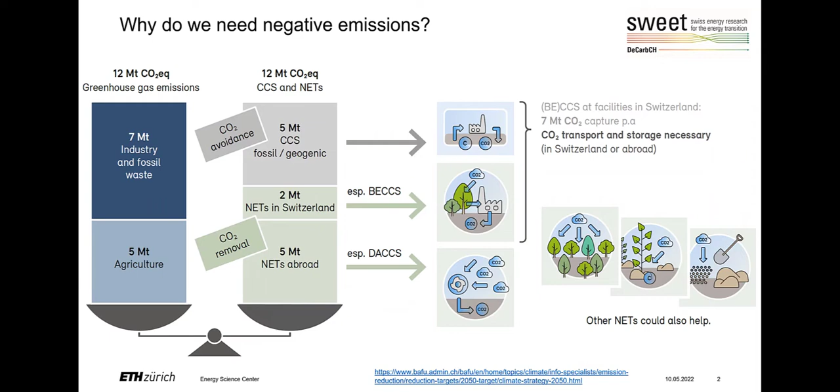So I use the same visual here and repeated essentially what you've seen before, with a small change: I want to understand whether we can do those 7 megatons of negative emission technologies actually in Switzerland - 7 megatons of CO2 per year removed from the atmosphere here in Switzerland.

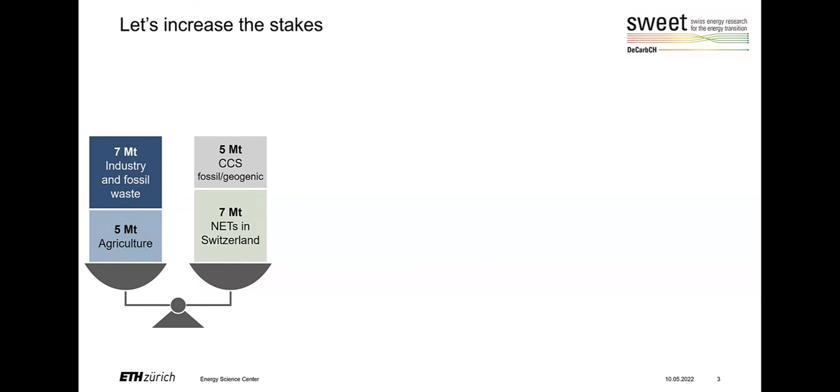But actually, we can also make it a bit more ambitious even. At the moment, we are not talking about aviation yet, but we have to, we should, and it's actually starting now, the discussion, including aviation. This may be some 6 megatons which come on top of this on the emission side, which will of course tip our balance, which needs to be compensated then with even more negative emission technologies.

And this is the space I want to explore now. What technologies do we need for that? And is there the potential to really do this?

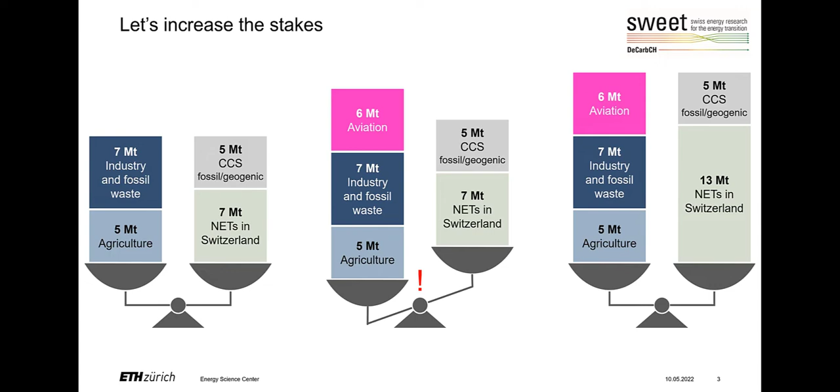What I will use for that is energy system modeling, as usual when I talk about those things. What is important to understand is that the basic thinking, the basic tool, is really to understand CO2 streams. There are 2 main reservoirs, let's say, of CO2. Actually, strictly speaking, it's not CO2, but a fossil fuel, for instance, or also a biological fuel like biomass, which however contains CO2 in the sense that if I burn it, it will be released as CO2.

So we have those 2 reservoirs. One is the subsurface, from which we can extract fossil resources. The other is the atmosphere, from which plants extract CO2 and make this available to us in the form of biomass. We can also do direct air capture, and I will talk about this as well. Now, this undergoes normally then some kind of process.

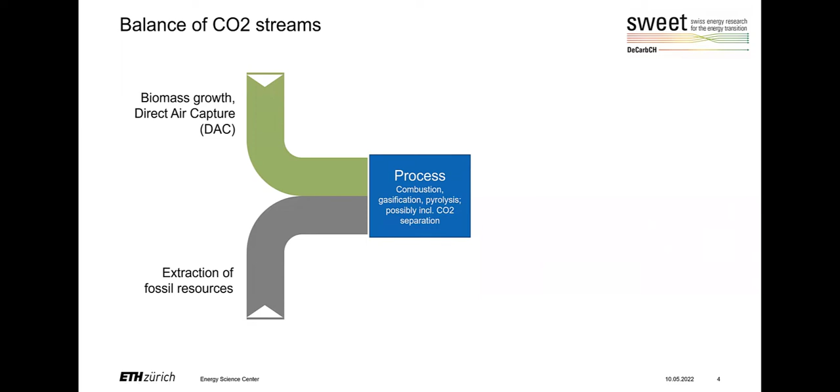Often a combustion process, but it could also be a gasification or pyrolysis process, possibly using also CO2 separation. And as a consequence of this, we again have two CO2 streams. One may go back to the atmosphere, released to the atmosphere, and the other may go to permanent storage in the subsurface, or in the case of the famous biochar, also in the soil.

So it's these balances that we need to understand in order to appreciate the value of negative emission technologies. And what I'm really interested in is two quantities. One is what I call the atmospheric balance. Do we emit actually more than we take from the atmosphere? Then we would have positive CO2 emissions. Or do we emit less than we take from the atmosphere? Then we would have negative emissions. That's what we're interested in.

And the second quantity I'm interested in is the amount of permanent storage, the amount of permanently stored CO2 in the subsurface, because this is coming with a challenge. We need to transport it somewhere and we need to store it somewhere. So it's these two quantities that I'm really interested in. Let's have a look at certain technological elements and how they fit into this scheme.

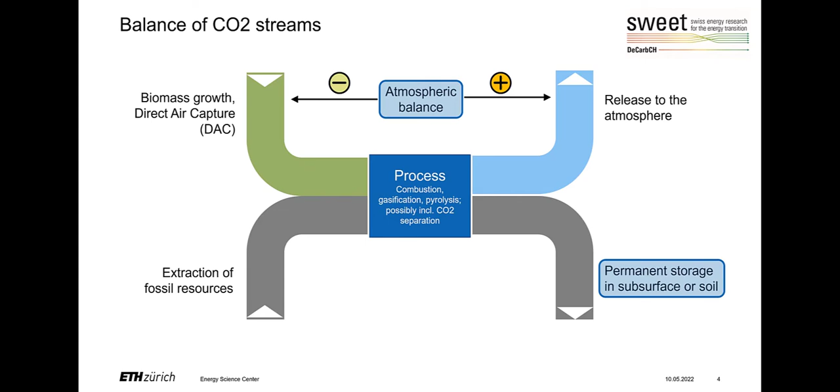Let's start with something that obviously we do today and we will have to stop doing in the future. That is fossil heating and mobility. We obviously extract fossil resources in the form of oil and gas from the subsurface. The process is the combustion, internal combustion engines or in gas or oil boilers, and we release it to the atmosphere. Clearly, it's a positive CO2 emission, which there's not a lot we can do about. In the moment that the emission is generated, it will go to the atmosphere.

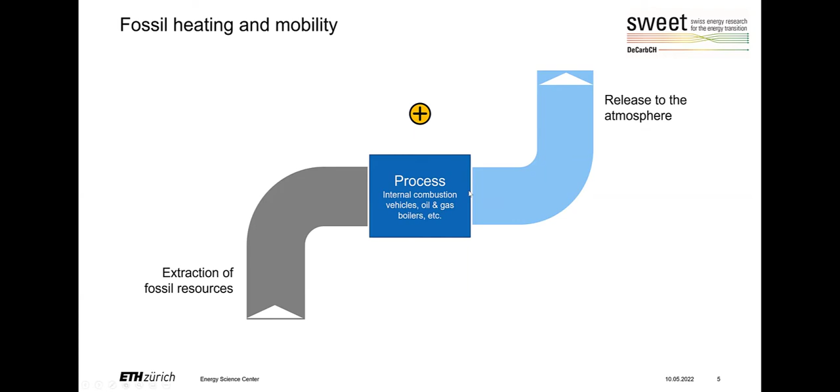The next option is gas CHP plants with CCS. Again, we will extract a fossil resource from the underground. This goes into a processing, in this case a gas CHP plant, possibly with CCS. And as a consequence of this, we have a big CO2 stream that goes permanently to the subsurface, and a small one, because normally we cannot take everything out of the flue gas of a gas turbine. This still goes to the atmosphere. So basically, we are CO2 neutral.

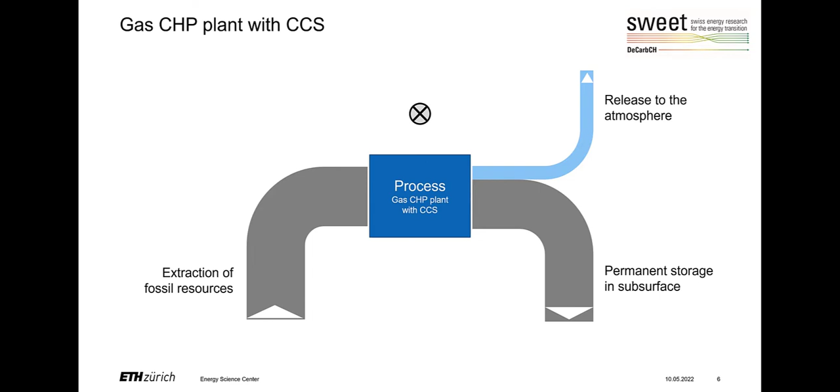Another option to be CO2 neutral is, of course, a wood pellet boiler, an alternative to oil heating as we may use it today still. CO2 is extracted from the atmosphere with biomass growth. And when we burn it in our wood boiler, it is released back to the atmosphere. And this is CO2 neutral again.

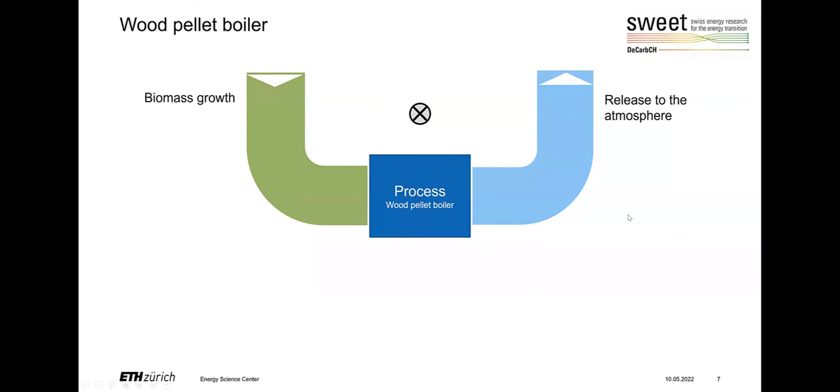This is nice because we are CO2 neutral, but we can do better than that. If we would use a wood CHP plant together with CCS, we would have biomass growth, and we would have a bigger unit, a wood CHP plant, probably connected to some district heating network, and we can apply CCS. What then happens is that the CO2 is taken from the atmosphere, and the largest part of it goes permanently to the subsurface. Again, a small part is released to the atmosphere. And with this, we are generating definitely negative CO2 emissions.

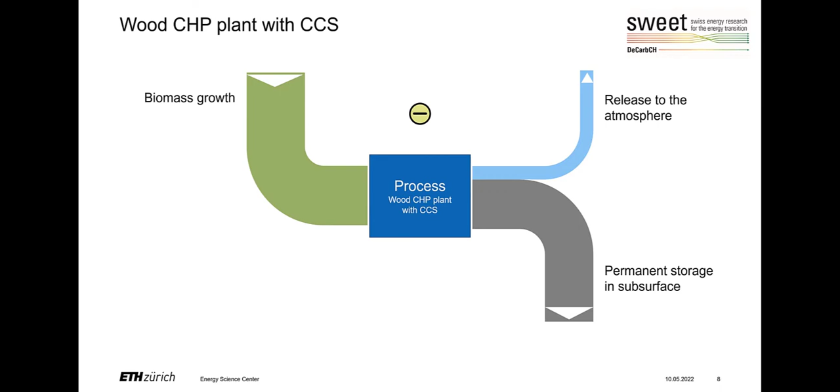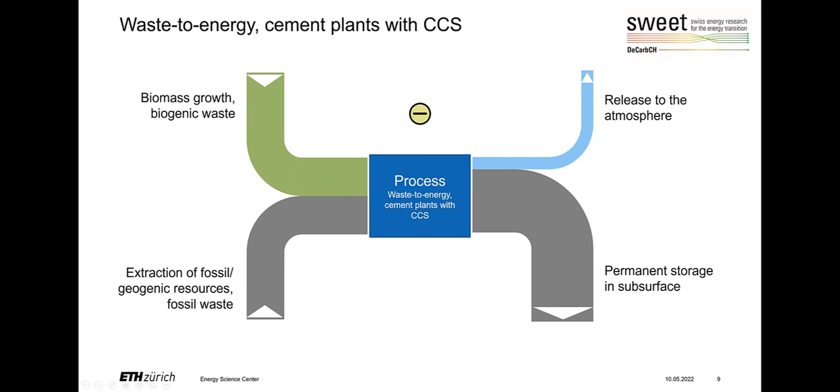The next option I want to look at is an interesting one: waste-to-energy plants or cement plants with CCS. They're a bit more complicated. Waste-to-energy plants burn partially fossil waste and biogenic waste. Cement plants may use wood to generate the heat, but there's definitely the limestone that enters and the reaction that takes place releases fossil CO2. So we have two streams, one coming from the atmosphere, the other from the subsurface. And again, when we separate the CO2 and bring it underground, we can generate negative emissions because we release less than we take from the atmosphere. It's a little bit less negative than the wood CHP plant seen before.

Now, I mentioned briefly pyrolysis.

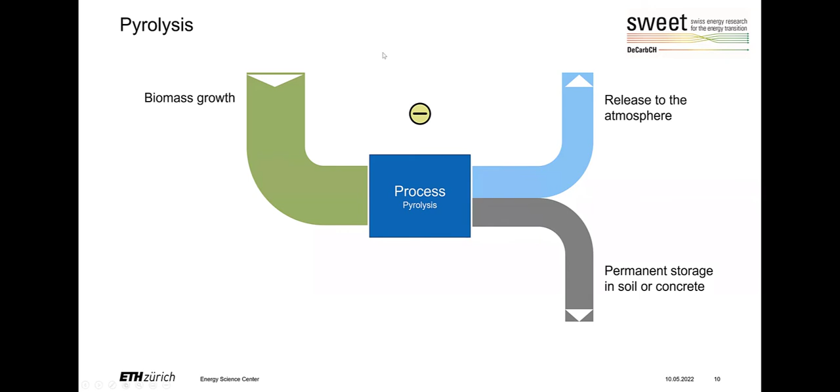Pyrolysis is a technology where you don't burn biomass, but instead heat it up in the absence of oxygen. What happens is volatiles are released, which can be burned to generate heat for the process. What comes out in the end is a certain amount of CO2 released to the atmosphere, and the rest leaves the system as carbon. This carbon is so stable that it can be put in the soil to enhance it, or added to concrete. So this also generates negative emissions, a little less than the wood CHP plant I mentioned.

And then finally, we have the famous direct air capture. This is technology being developed by the Swiss company Climeworks, where we extract CO2 from the atmosphere, which is much more difficult because there's a much lower concentration of CO2 in the atmosphere. We bring it permanently underground, and of course we generate negative emissions.

Now, all this I've shown you so far sounds awfully qualitative. So can we put some numbers to this? Can we make this quantitative? Yes, of course we can.

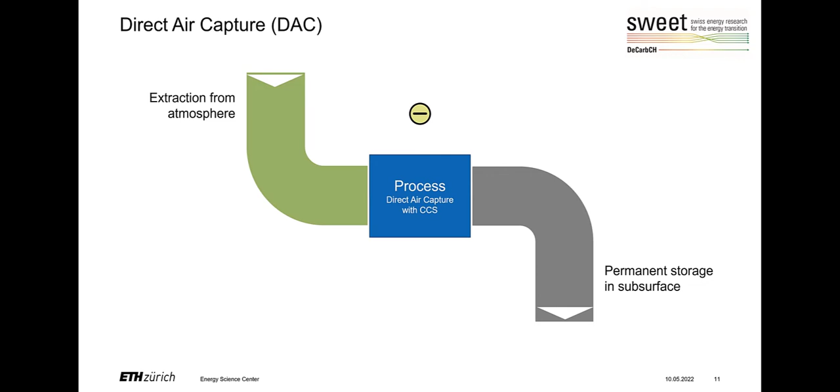What we need for this is energy system models. The energy system model balances all the CO2 and energy streams within the energy system: heating, electricity generation, and mobility. The results I'm showing were generated with Swiss Energyscope, a model originally developed at EPFL and then further developed at ETH. There's a linear optimizer that optimizes the design of the energy system and also its operation throughout the target year.

I'm jumping to 2050 and want to understand how the world looks in 2050. We minimize total system costs for a given CO2 target, and then we vary the CO2 target because we want to see which technologies are important for which CO2 targets. This is how I will present my results in the next minutes.

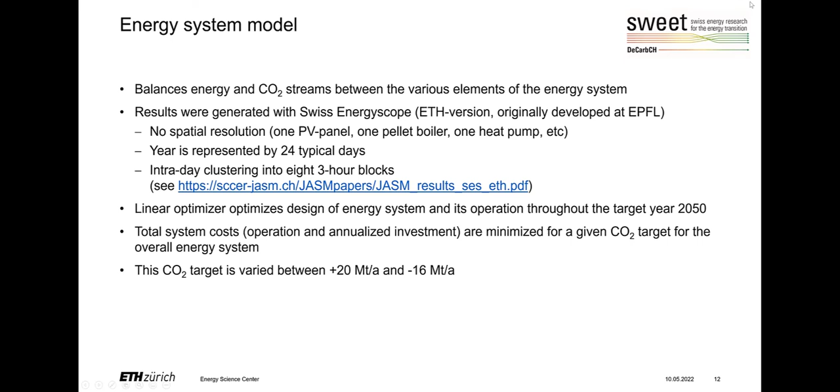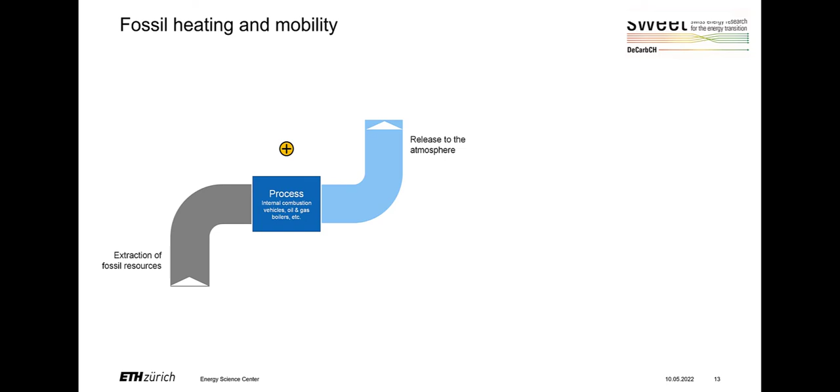So let's go back to these various technologies I was talking about before, starting again with fossil heating and mobility. What I want to understand is how these emissions change if I change the CO2 target from a not very ambitious target of, let's say, plus 20 megatons per year for the whole energy system, down to a very negative range of up to minus 16.

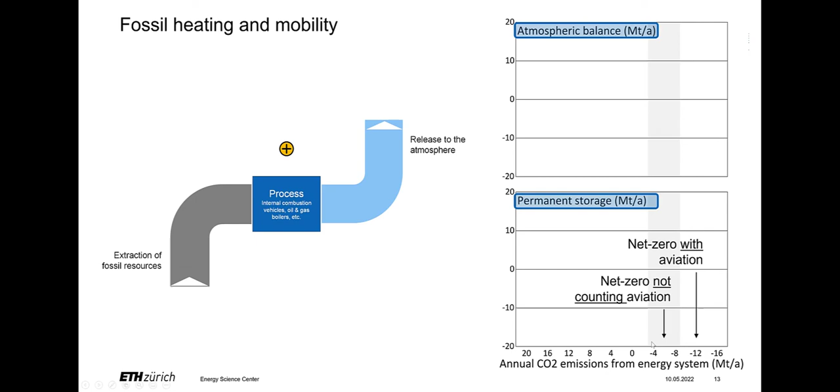So now we use the energy system model: we decide we want the optimum system for 20 megatons CO2 emissions per year. I run one scenario for the first CO2 target and get a point. Doesn't look very spectacular—we'll have these kinds of emissions from fossil heating and mobility, so almost 10 megatons. And of course there's no permanent storage because in this case it doesn't apply.

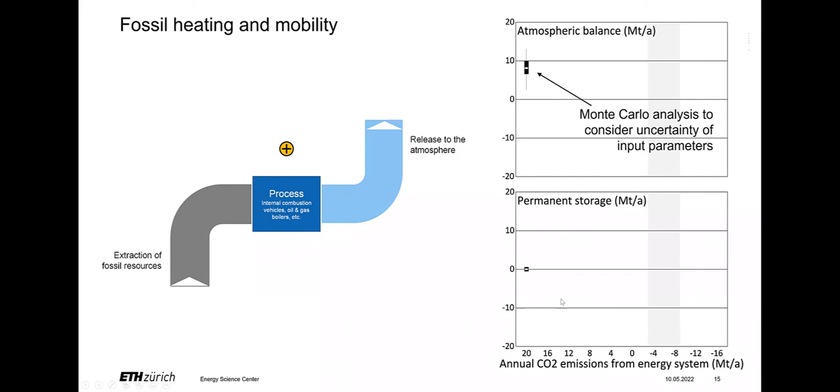Now, one point is not interesting. What we always do is a Monte Carlo variation of all parameters we consider uncertain, like population count, future climate, prices, and so on. In reality we have a distribution—I don't believe in single numbers, I'd like to show a distribution. This is done for 20 megatons, and then we repeat it for 19, 18, and so on, and we get a complete picture.

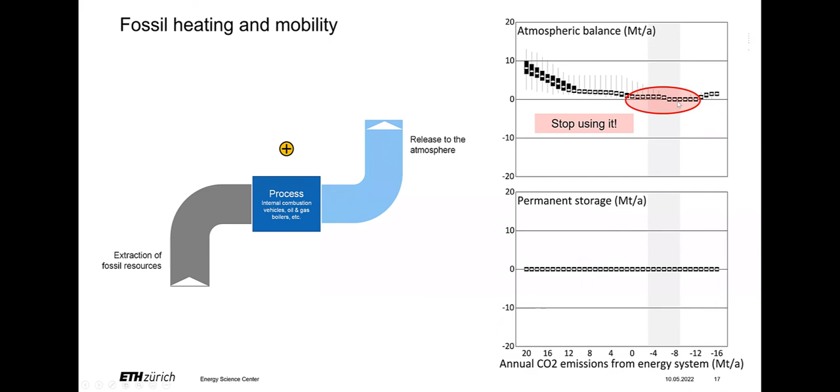We repeat this for every CO2 target, and we see the trend, and the trend is very clear here. When you're not very ambitious in your CO2 target, you still emit 20 megatons in the energy system. Fine, continue burning oil and gas and gasoline and diesel in our vehicles. But there's a point where this has to go down, and eventually you stop using it. That's more or less the only option we have here.

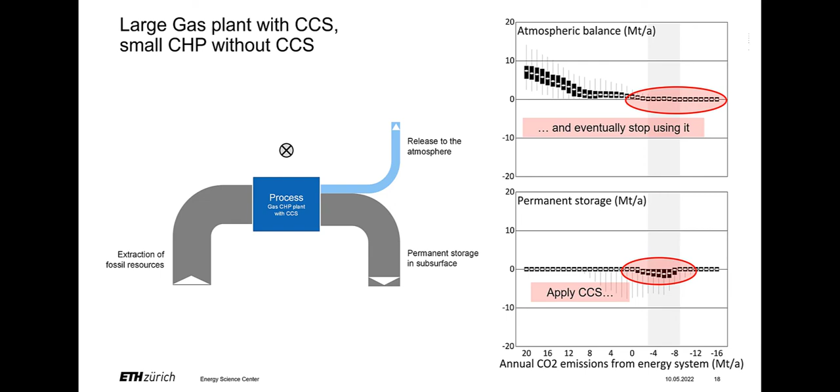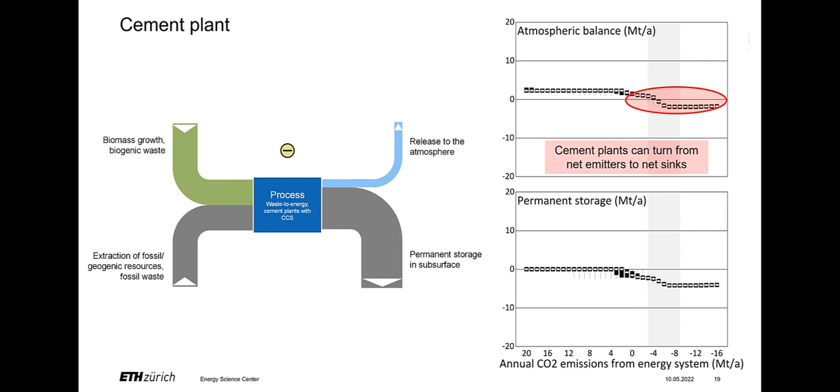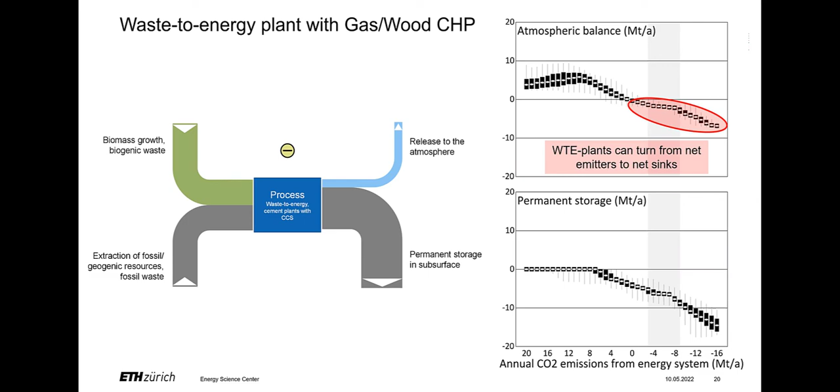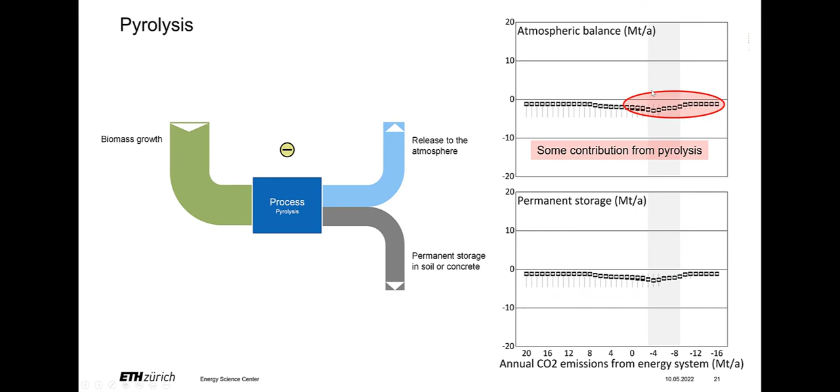So these were the various technological options for how to either avoid emissions by just not doing something that we are doing today, like not driving around with diesel and gasoline cars, not burning oil and gas in our houses, and then capturing CO2 from point sources, up to the end, where we would capture CO2 directly from the atmosphere.

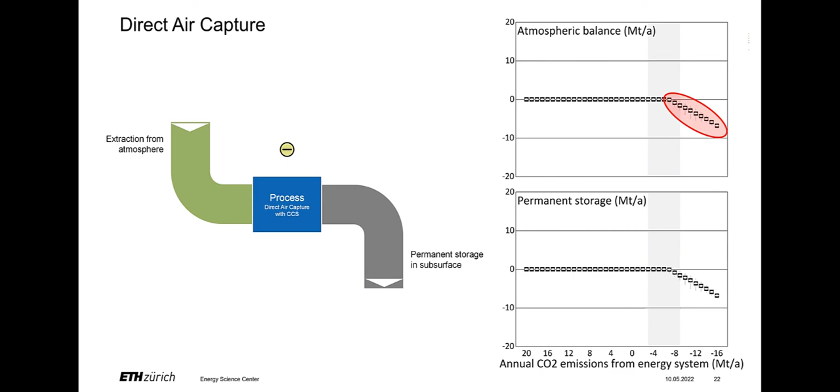It's important to say that when you don't have a very ambitious CO2 target, you're not starting with CCS from point sources, and you're also not starting with direct air capture. You do all the other things first—you decarbonize heating and mobility with heat pumps and electric cars. But then comes a point where you start deploying CCS on point sources from a certain ambition level on, and later comes a point where you even deploy direct air capture.

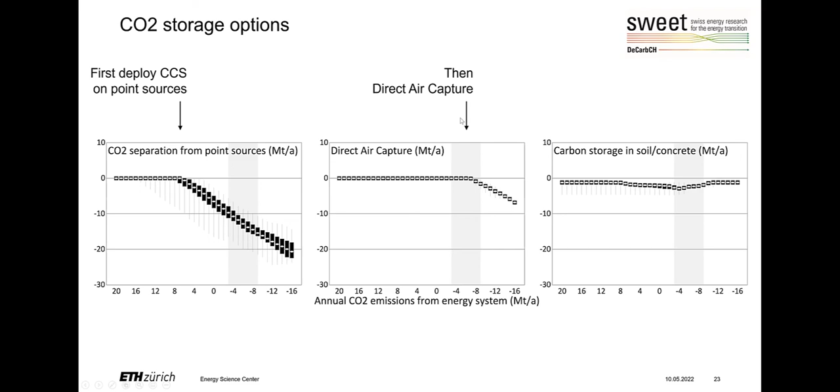It also depends a bit on the target we set ourselves. If we set, for instance, a net zero target not counting aviation, we will definitely need separation from point sources, but we don't necessarily need direct air capture. If we are more ambitious and want to also compensate emissions from aviation, we need everything: the decarbonization via electromobility, the point sources, and even direct air capture.

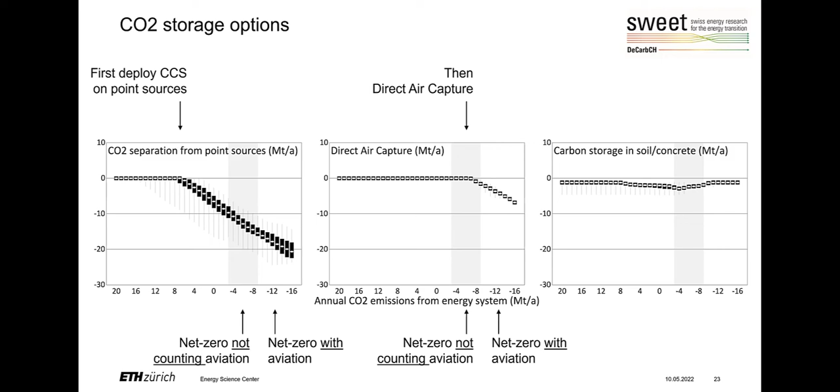So this was an overview of the various negative emission technologies and how they play together to really reach our CO2 targets. Now let me close by raising a few questions that need to be addressed, and that's basically the work that we are going to do in DeCarbCH.

The first one is the optimum heat integration of the CO2 capture process. I didn't talk a lot about the CO2 capture process. Essentially, there's an absorber where the flue gas of a combustion plant goes through, and it leaves in the form of cleaned flue gas. The CO2 is absorbed by a solvent, normally some kind of amine, and then you have a stripper where you remove the CO2 again from the solvent, giving you more or less pure CO2.

The problem is that the CO2 separation has a pretty large heat demand at a relatively high temperature, maybe 150 to 180 degrees—this is especially in the stripper where you have to add this heat. But it also has a cooling demand, and that's the interesting thing. The cooling demand is obviously at a lower temperature than the heating demand, but it's still at a temperature that could be interesting for energy grids.

It could be elevated a little bit by a heat pump and then maybe used directly. This is an opportunity and a challenge to be explored via process integration and pinch analysis. For me, this is the direct, obvious touching point to the rest of DeCarbCH—we'll work with Beat Wellig and his team on this within work package 12. But generally, if we can say we have a lot of energy and ask where we can use it in thermal grids and so on, I think this is interesting for DeCarbCH as a whole.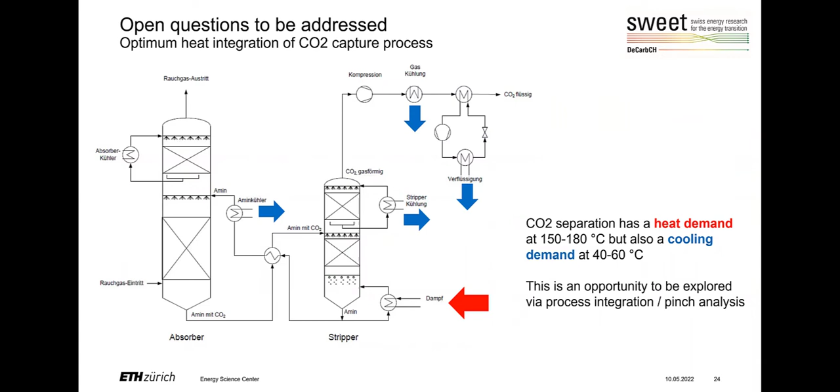Another question, which we will not really address in DeCarbch but is so important that I still mention it, is the question of where to store the CO2.

Before the times of sweet DeCarbch, I was working for the SCCER supply of electricity, and there we already looked at CCS in Switzerland. Even before that, there was a first study more than 10 years ago where the potential was estimated to be relatively high—several decades we could store CO2 in Switzerland under the Mittelland. You can recognize here the Mittelland.

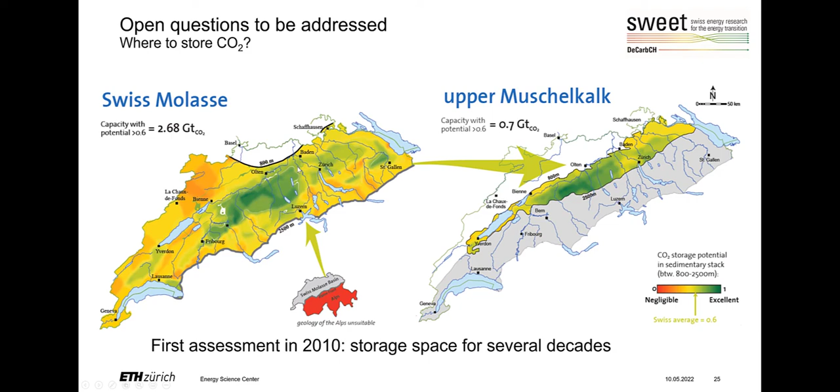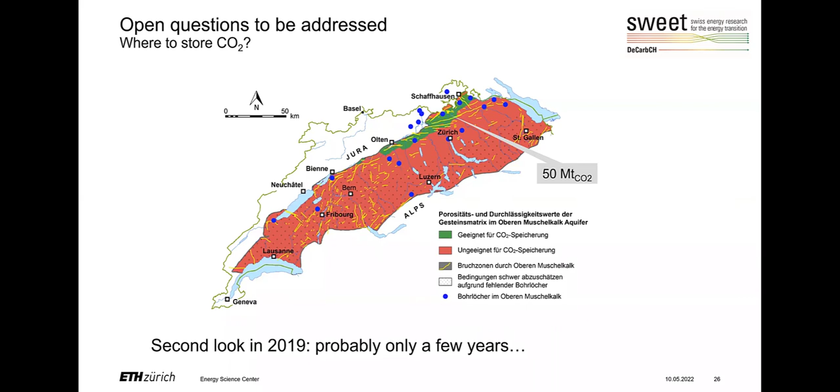Unfortunately, as researchers do, we had a second look, wanting to know it better, and the potential went down—from a few decades to probably only a few years. This means we shouldn't really bet completely on underground CO2 storage being possible in Switzerland. We need very likely a European solution—connecting to a network, which obviously doesn't exist yet, and to storage sites in the North Sea.

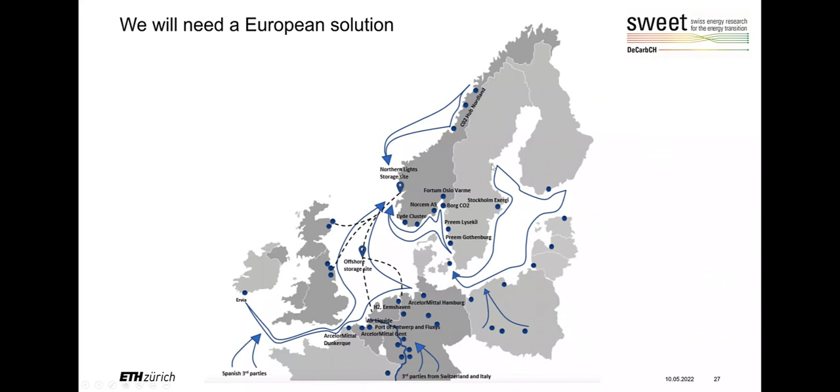Those storage sites exist already because the Norwegians for many years have pumped CO2 underground into depleted oil and gas fields. That is technically possible. The difficulty is to bring it there. A study funded by the Swiss Federal Office of Energy looked at how to get the CO2 to the Swiss border.

A first layout was made which connects the cement plants and waste-to-energy plants via a western trunk line and an eastern trunk line. You can find all the plants on this map, and it brings them to Basel. From Basel north, hopefully we can arrange with our neighbors, the Germans and the Dutch, to have a pipeline that brings us to Rotterdam, from where it could be picked up by companies like Northern Lights, which will store the CO2 underground.

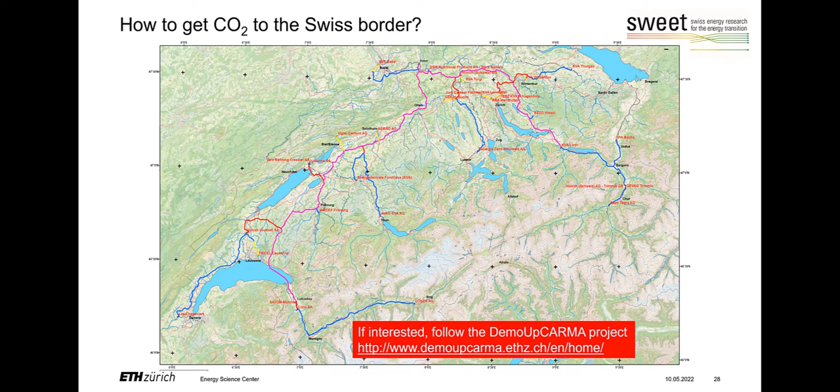The alternative would be to go south via Martigny to Geneva and to the Mediterranean Sea. If you're interested in this, there's a very interesting project at ETH now, the DemoUpCARMA project, which will look at the implications of CO2 transport and storage.

There are a couple of further questions which need to be addressed. I talked a little bit about aviation - just a little, because this was not really the major subject of the work that led to this presentation so far. So far we have only considered the compensation of fossil fuels - we assume we still burn fossil kerosene and want to compensate it, and we see which technologies are needed to get there.

The synthesis of fuels via power-to-liquid or biomass-to-liquid may offer additional opportunities which need to be explored, and this will be one of the next steps in this scenario analysis. It's not only opportunities but also challenges, because if you want synthetic kerosene, it will contain carbon, and this carbon cannot be put underground anymore. So it may actually jeopardize our possibilities to do negative emissions. This all has to be put together in one understanding of those CO2 streams I was talking about.

Pyrolysis is a big hype at the moment. It's considered in the model, but it has to be further worked out. The question is also how realistic is it to pyrolyze digestate from manure fermentation. There's a problem with logistics, and definitely also a problem with nutrients, which need to be considered properly.

Then there's carbon storage in wood buildings - also a very hot subject at the moment. I need to put this in my model; I've already prepared it. The interesting thing will be to understand the trade-off: we have a wood building versus a concrete building. Fine, but the concrete building is not a static target.

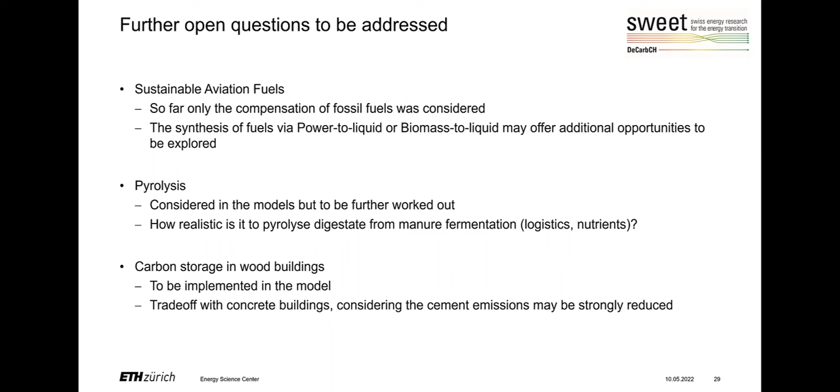Let me conclude by summarizing the steps towards net zero, and let me pick up what I said at the very beginning. This is not about doing CCS in order to still continue driving around with a diesel SUV. No, you have to get rid of the diesel SUV and get rid of your oil and gas heating. Then you do CCS in order to compensate emissions from waste plants, cement plants, and so on, where you can do nothing about it. In addition to that, you need even to generate negative emissions, to extract CO2 from the atmosphere with negative emissions technologies - bioenergy CCS, in different variants such as wood CHP plants, but also cement and waste-to-energy plants, and eventually also direct air capture. But whether we need this technology in Switzerland depends on the ambition level we have for our emissions in the future.

This was the short overview I wanted to give you. Thank you very much for your interest, and I'm looking forward to your questions.